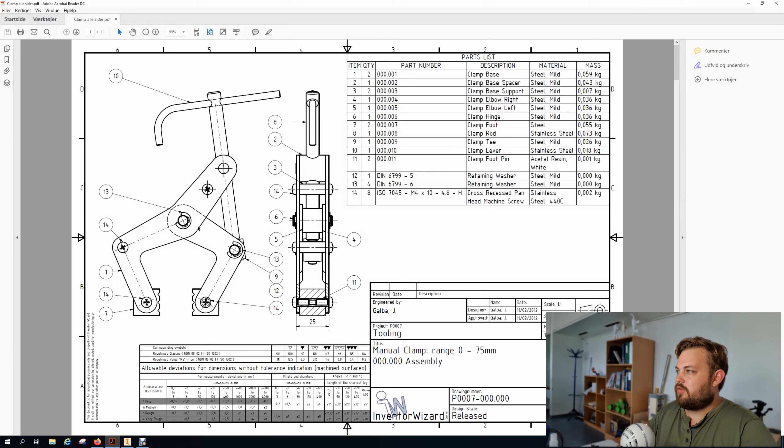This is part 2 of the Inventor tutorial series, and in the last video we went briefly over this assembly drawing right here, and then we went into making this part right here. And in this video we will go into this clamp base support right here, and the structure of this is relatively simple. It's just a cylinder with two smaller diameter ends, and then it has a thread all the way through it.

So let's start by opening up Inventor and then making a new part. And we want a standard millimeter.ipt part. Create. And then we want to start by making a sketch. And there are several different ways that we can make this actually. We could make a circle and then draw that out and make one end and mirror that over. But I'm going to show you a different way in this video.

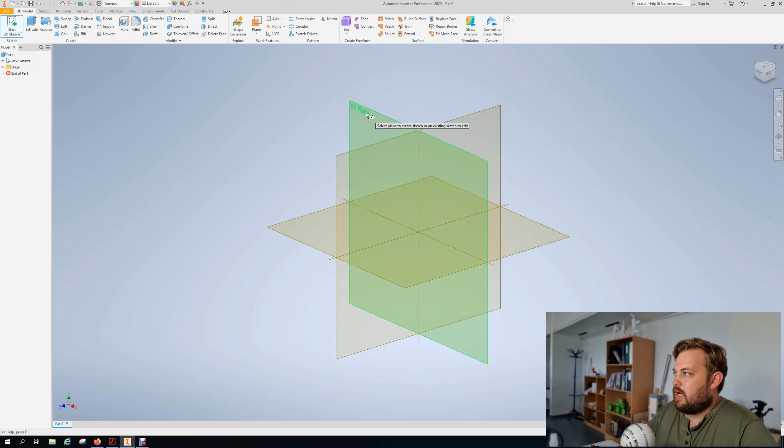The first thing we want to look at is actually this right here. It has a diameter of 8 millimeters and a length of 24. So let's go in here and take this XY plane. And the first thing we're going to do is just take a line and go 24 millimeters up, because that's the entire length of this cylinder. Then we'll look at the drawing again.

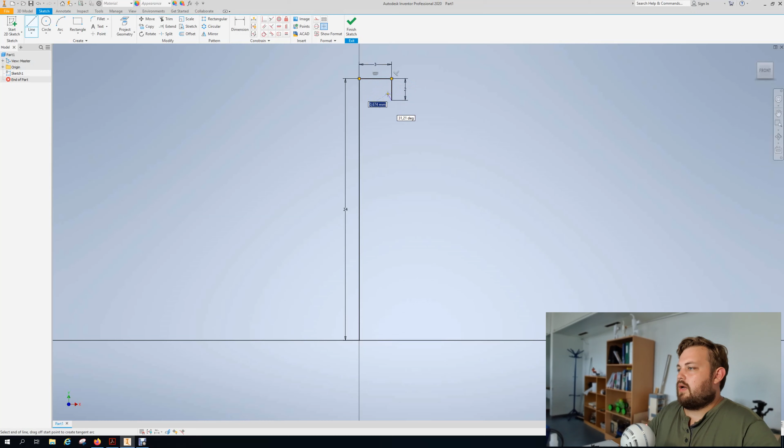Each of these ends is 2 millimeters and they are a diameter of 6 millimeters. So let's go up here, line, and we only want to make half of this, and I'll show you why in a second. And half of a diameter of 6 is 3 millimeters, and then go 2 millimeters down. And then the entire diameter of this was 8 millimeters. And we only want half of that as well. So we're going to move over 1 millimeter since we already have 3 of them. 1 millimeter.

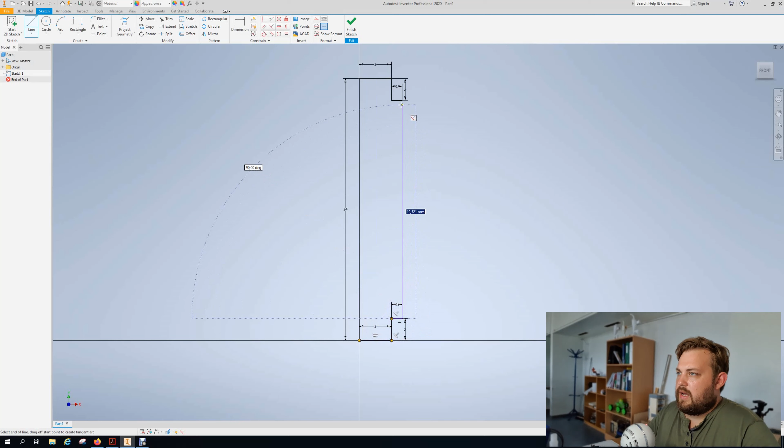And let's do the same thing on the bottom. So 3 millimeters, 2 millimeters up, 1 millimeter over. And then let's connect those two. Now we have this shape right here. And what we want to do with this is finish sketch. And then we'll use this revolve tool. Either click up here or press R on the keyboard.

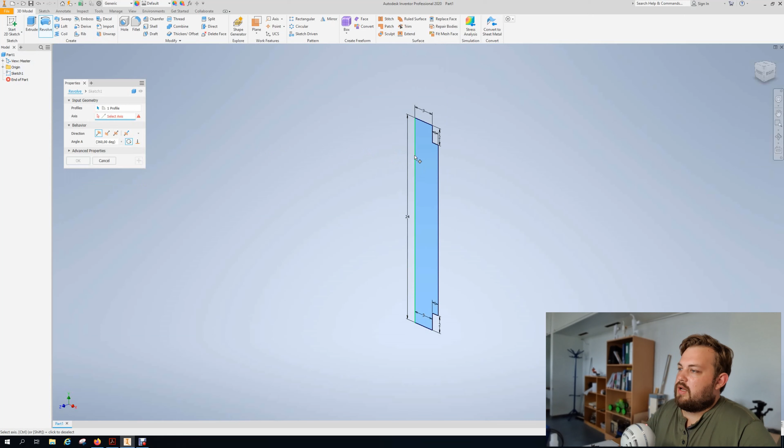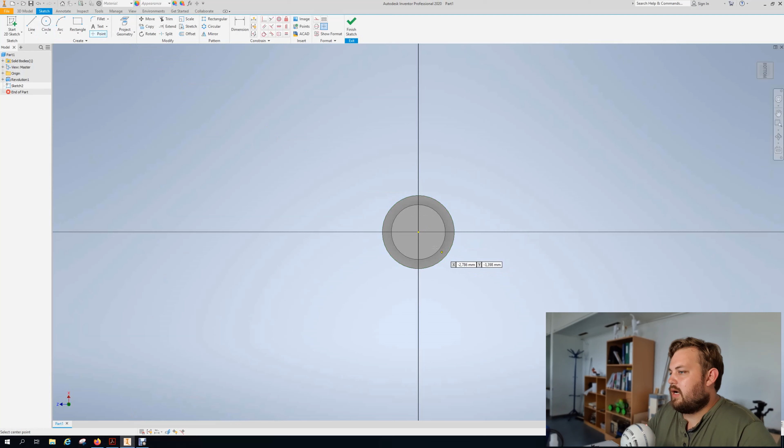And then we want to click on this center line right here. And we want to make sure it revolves 360 degrees. And click OK. And there we have the basic shape already. All we need now is just to drill this hole in the middle and pick a material. And actually, you know what? It's countersunk. So instead of making it with a circle, we're actually going to make it with a point and then drill it out with the hole function. There we go. And then hole.

And since it's the only point that's there that this function can select, it'll automatically pick this one. And we want it to be an ISO metric profile, of course. Size is 4 millimeters. And it's an M4 by 0.7. And up here we can actually choose a countersunk hole from the very get-go. So let's do that. And this just means that it's a tapped hole, so it has the thread already.

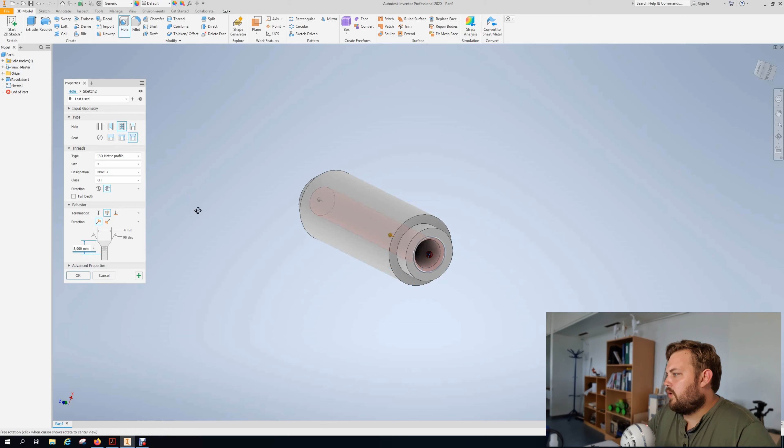And here we can see the diameter of the outside is 4 millimeters. And that's actually what this thing says right here as well. This is a countersunk symbol, so it just means that this hole is countersunk. And the diameter is 4 millimeters. So let's go back in here. And we want this thread to be all the way through, because that's what the drawing says it is. You can see this line right here and right here. That shows that this thread goes all the way through this model.

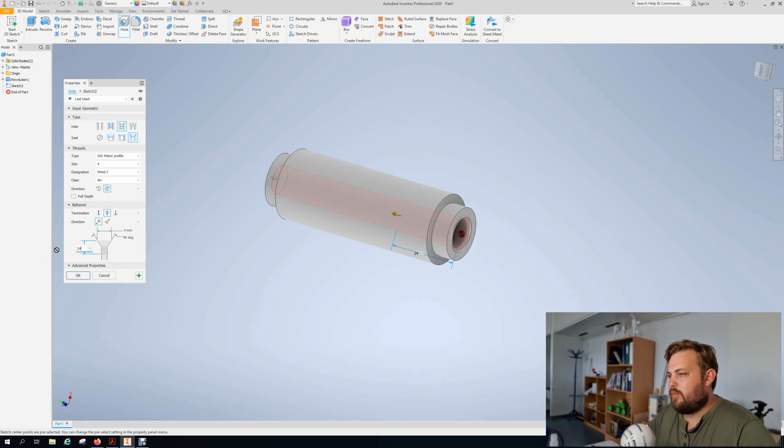Back in here. We want the thread to be 24 millimeters because that's the entire length of the model. And then just press OK. Now we have the thread all the way through. Now we can see the countersunk is only in the one end of it, and we want it in both ends. That's what the drawing says. So a quick way to do this would be to use the chamfer tool, but then we'd have to measure this out and figure out how much of the countersunk it is.

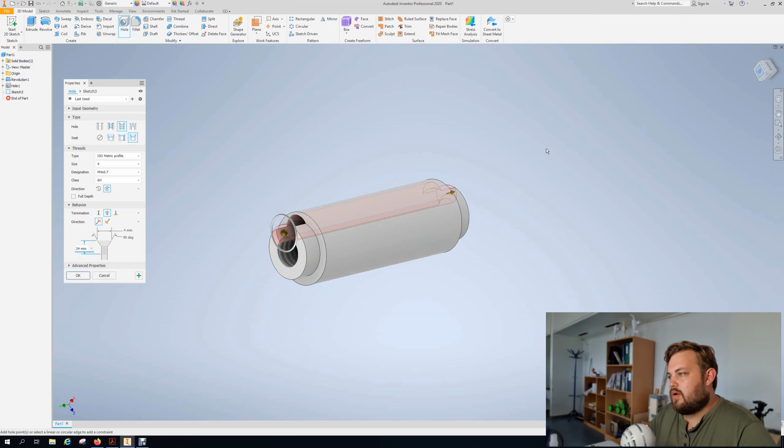So we can just take this hole function again, click on the surface, and then click on this circle right here. It'll automatically move into that position, and then just click OK. Now we have the countersunk in both ends.

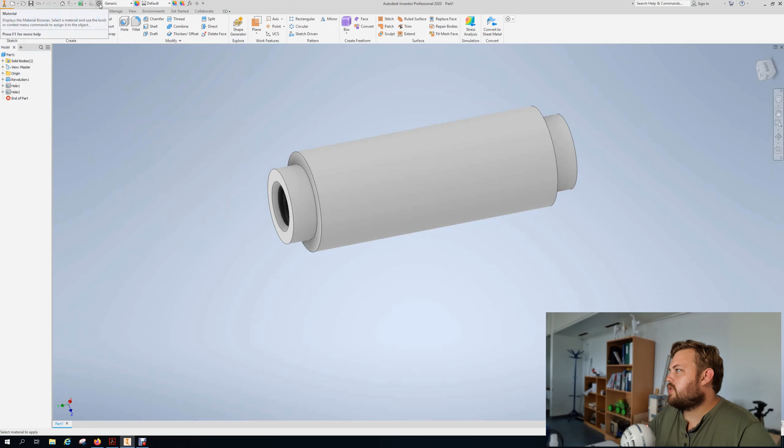And then we want to pick the material, and we can see on the drawing that it is a steel mild type again. So back in Inventor, up here next to generic is this little circle called material. Click on that, and then we're going to find steel mild there, and then just click on this arrow on the outside of it to make sure that the model downloads this material type.

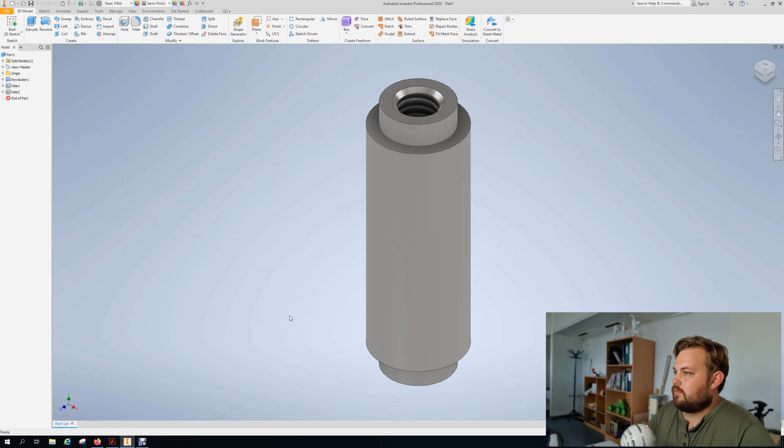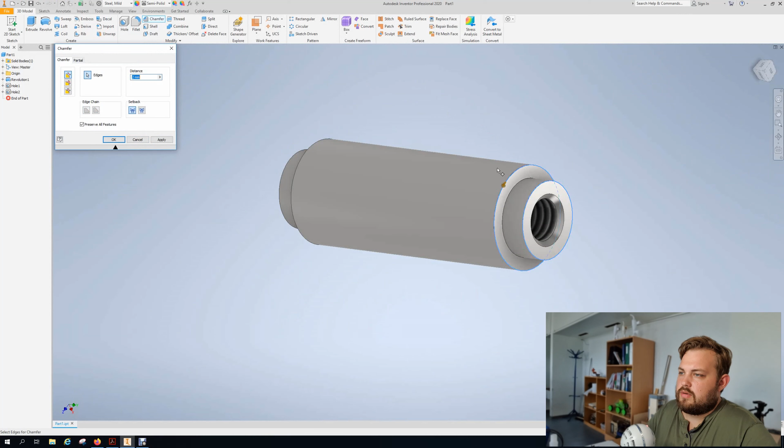And let's just have a quick look at this drawing. These break sharp edges. It means that all the edges that could be sharp when this is produced need to be chamfered by 0.1 millimeter. And we do that by taking this chamfer up here and clicking on each of these edges that could possibly be sharp. The standard distance is 2 millimeters, and we want to change that to 0.1. And then click OK. Then go back into this drawing.

Now we have a diameter of 8 millimeters and a diameter of 6 millimeters on both ends. This goes down 2 millimeters on each end, and the entire length of this is 24 millimeters. We have a thread that's an M4 by 0.7 with a countersunk in each end of 4 millimeters by 90 degrees. The material type is steel mild, and all the sharp edges have been broken by 0.1 millimeter.

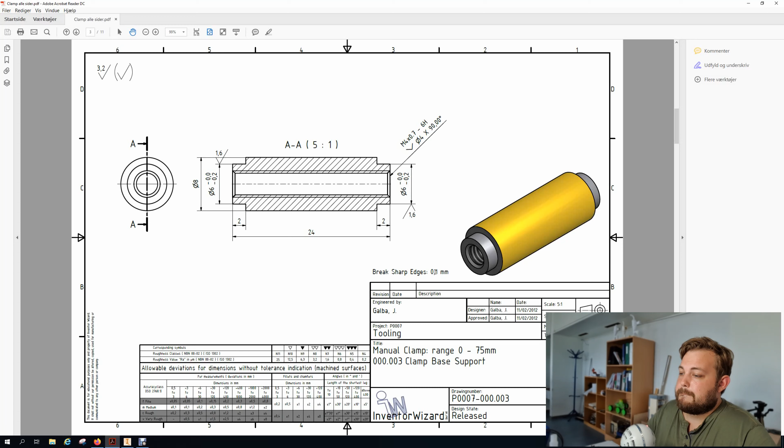The name of this is clamp base support, so all that's left to do is actually just to save this. So go to File, Save As, and then save this as clamp base support. Clamp base support. Save.